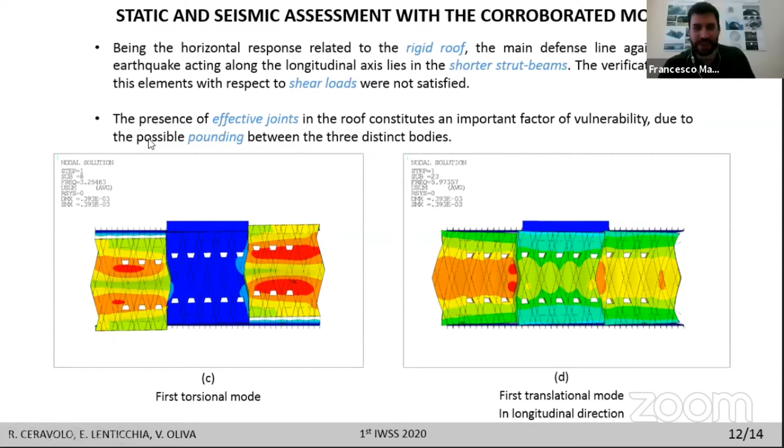Thank you. Thank you. So we have the last presentation by Abruzzese, Tiero and Micheletti, and the title is Permanent Monitoring of Thin Structures, and presenting is Abruzzese.

Yes, good morning, everybody. Thank you for this occasion to discuss, even with everyone at home or somewhere else. Is it clear? Can you see me? Yes. Yes. Yeah. Okay.

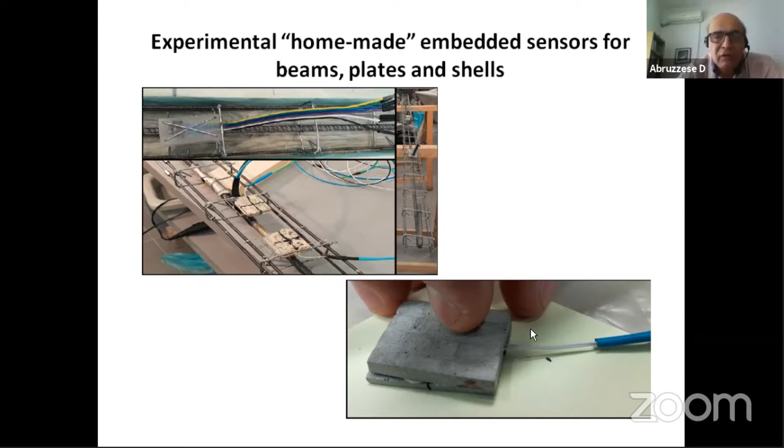So this presentation is inside a larger project. It's called the MONI2BSafe project, and the main idea is to make a monitoring system of the structure. In this case, we are talking about thin structures, but of course our work can be extended also to other situations. The main activity we have is to prepare some devices, like homemade embedded sensors. We put them in the beams or in the shell or other kinds of concrete structure, mainly concrete structure, but it can also be extended to steel structure.

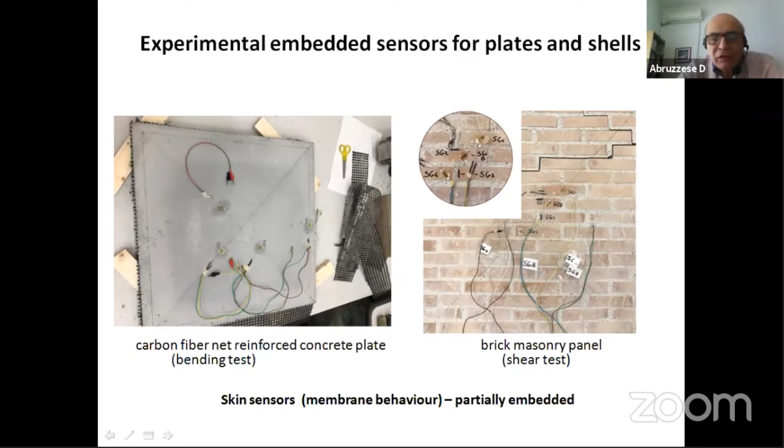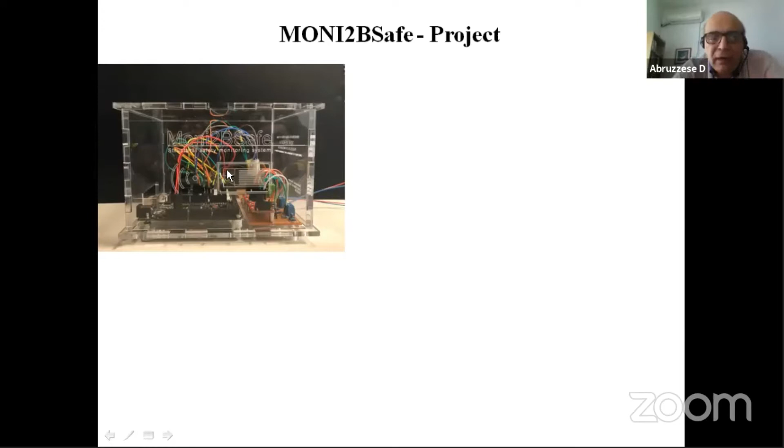For instance, we have here some plates. This is a concrete plate reinforced with carbon fiber net. And on the other side, we also have a brick masonry panel. We put them under test with some typical bending test or shear test. These sensors are just skin sensors, and all of them are controlled by a small Arduino-like system. Here we see a little box we prepared and tested.

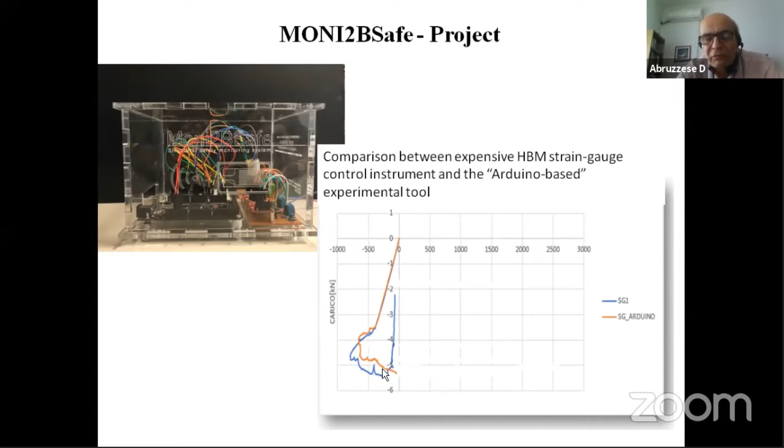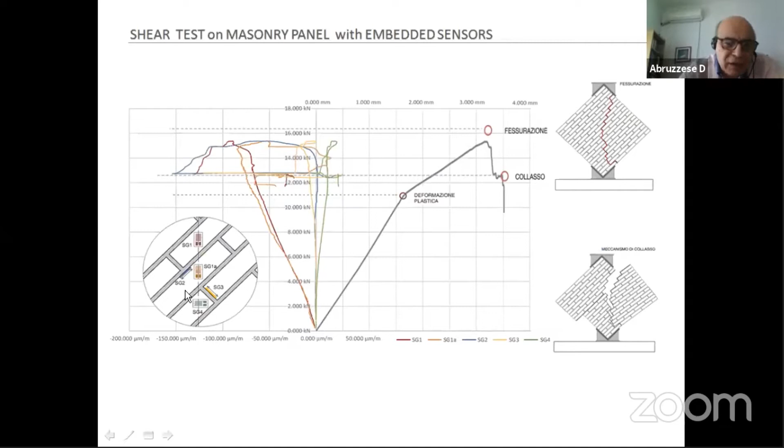This is a very simple example of comparison between one sensor controlled by our small box and another sensor controlled by a very expensive machine, more than 50 times more expensive. And you can see, except the last part related to the collapse moment, all the rest is in pretty good agreement. This is another test related to the shear test of a panel, and you can see here our small device. The devices are deformation devices.

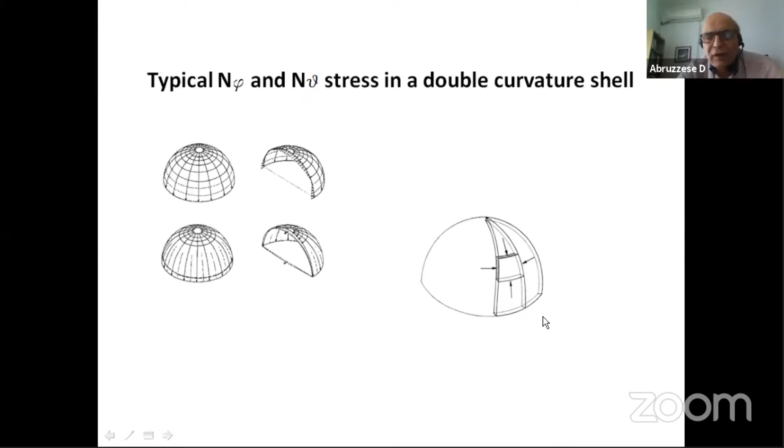Instead of using accelerometers that give you just indirect information about the stress, we are using deformation, which can give direct information about the stress. Imagine a shell with a double curvature and n phi and n theta stress. We need, of course, some model to solve this structural problem. But if we put in one point some deformation sensors like this one, we can have a sort of skin effect, meaning membrane behavior, while other inner embedded sensors can give you information about the flexural behavior.

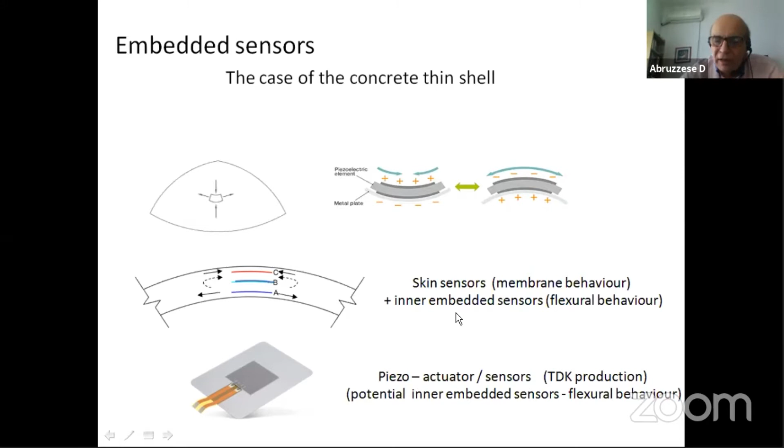Now there are some piezo actuators or sensors. Actuators can be controlled by electricity, but it can also be reversed. In this case, we are using the reverse way, as sensors, and they can give you information about the deformation. We can have information about the rotation, the curvature, the variation of curvature, and that means also stress.

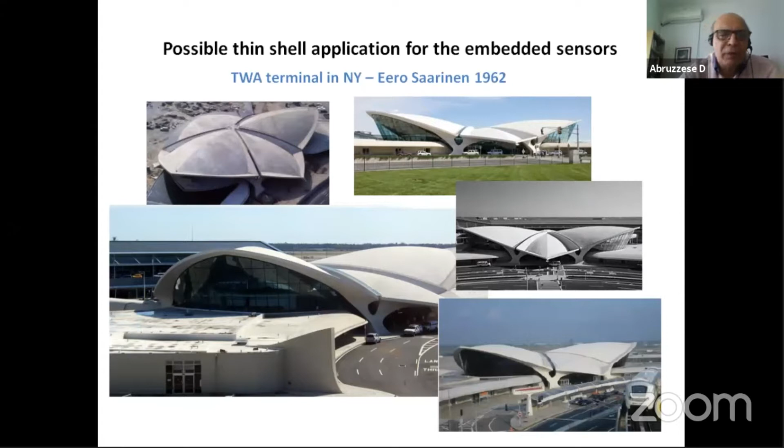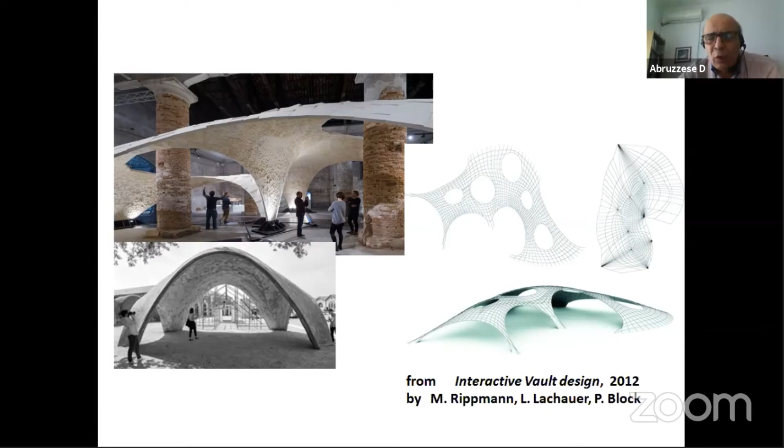Just imagine some very complicated shell like this one: Eero Saarinen's wonderful TWA terminal in New York from 1962. You can see it is not so easy to make the calculation. We are talking about a double curvature shell, and what they do now is use very complicated systems like Rhino, Grasshopper, and other computer-aided design programs, and then you can have some idea. But you always need to check your design with some control.

So our idea is that if you have a very complicated structure like this one, a tennis center in Hangzhou in China with 80,000 people capacity, made with Grasshopper and other systems, they call it also RIMO, meaning Rhinoceros plus model, or some other program that helps you control the shape and also the structure, you also need to do monitoring.

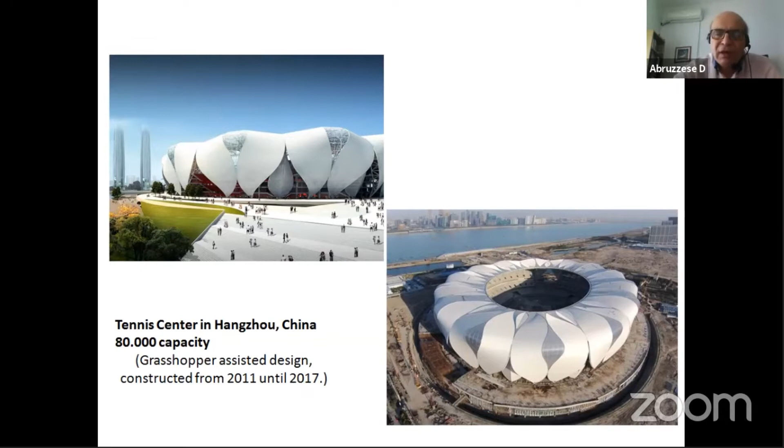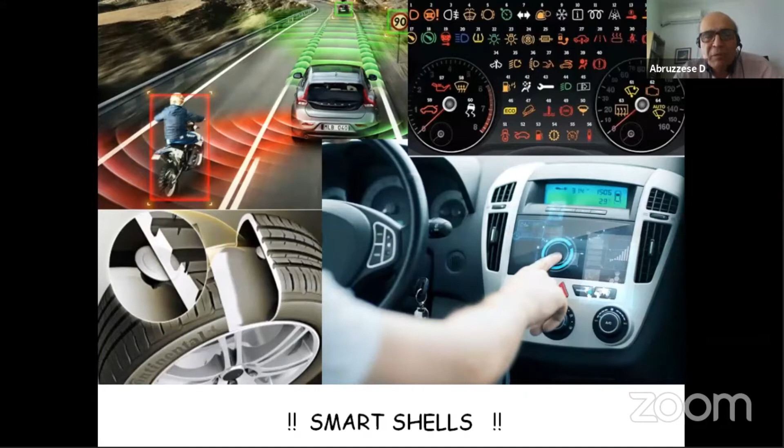Monitoring is very cheap and nowadays very simple to organize, and we need to use it because then you can have very good control of the structure, like you have in your car. In your car you can control everything: your tires, your temperature, everything. Why, as civil engineers, can we not control our wonderful shapes made by some crazy architect? Why not? Thank you very much.

Thank you, Professor Abruzzese. I see that there is a question from Amedeo again. Where is Amedeo? Yes, I'm here. Yes, Amedeo, I see you. Ciao, Amedeo. Nice to meet you. Thank you very much for the nice presentation, Professor.

I want to ask if it's possible to also use acoustic emission sensors, which are piezoelectric sensors positioned on the surface of the structure. In this case, you can also localize the source of damage by triangulation.

Yes, look, this kind of system is being used mostly on suspension bridges, on the main cable, and they help you to make this localization. So I can never say don't use this or use that. I would use everything you can. Now it's very cheap. It's not very expensive.

Okay, acoustic emission is not so efficient in the sense that you need a very high frequency recording system to get this information. So you always need to have your ear there, but you cannot do that. So it's related to the number of samples that you get from your system. But in that case, it's pretty useful.